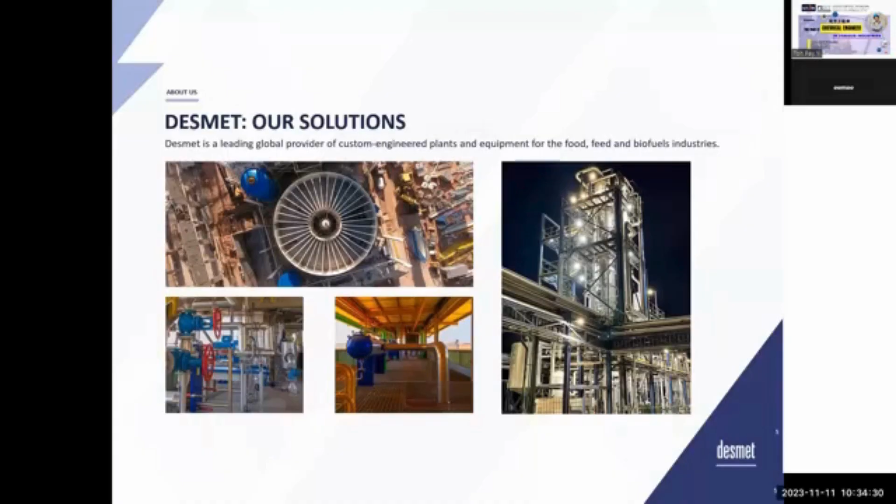So what you see here is some of our products. We are actually a technology provider, so our market is not limited to food, but also including animal feed and the biofuel industry.

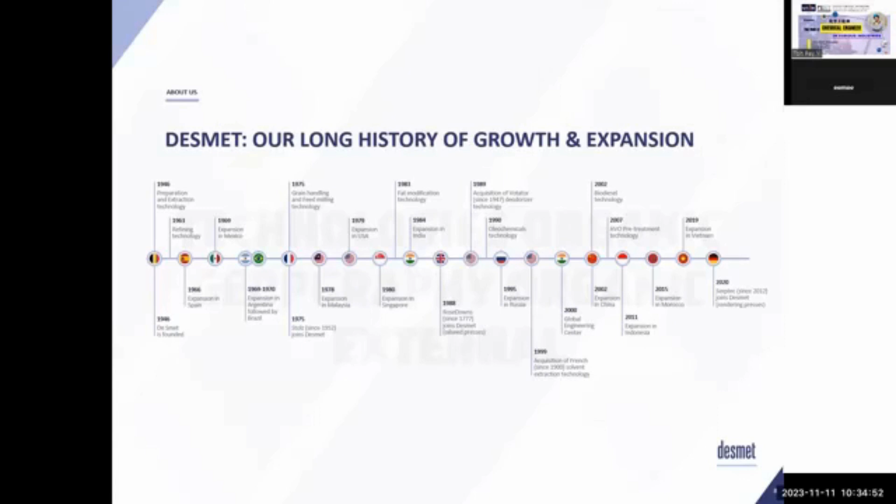Okay, so some key figures about our company. This company was actually founded back in 1946 in Belgium. Our principle that differentiates us is we always emphasize reliability, accessibility, sustainability, innovation, and being value-minded. When we mention accessibility, it's because we have a presence in more than 50 places around the world.

Okay, so this offers a complete technology offering from oil seed up to the product. From oil seed to the oil seed mill, then from there onwards we have the oil processing line, the biofuel, and also the oleochemicals.

Let's look at the production of vegetable oil worldwide. So from what you can see here, palm oil actually has the highest volume of production, with more than about 40% of total production over the years.

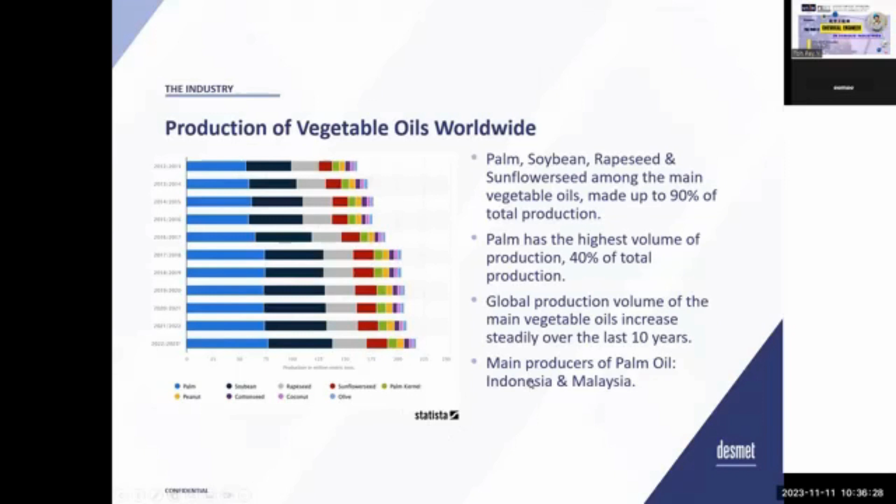So we can see that palm oil is steadily increasing over the last 10 years, and probably all of us are aware that the main producers of palm oil are actually Indonesia and Malaysia. That is about the production.

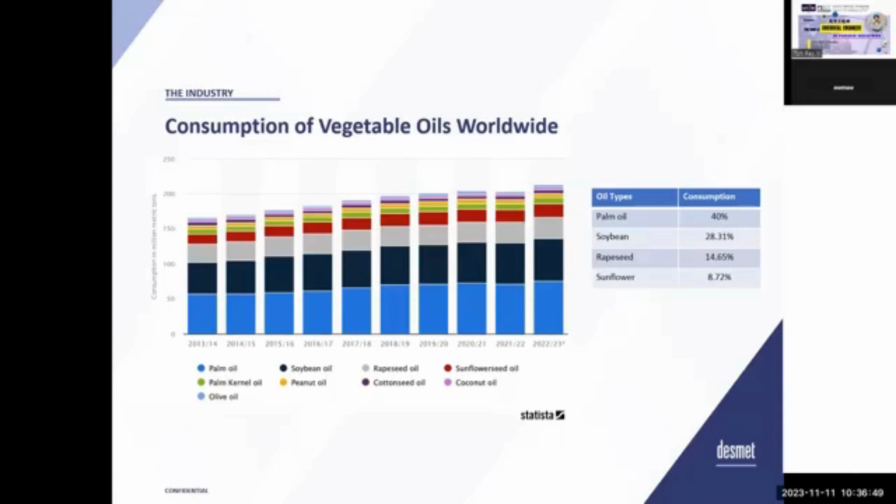So how about the consumption of vegetable oil worldwide? Again, palm oil is actually the major oil that is being consumed worldwide. So by far, palm oil is actually the most efficient crop.

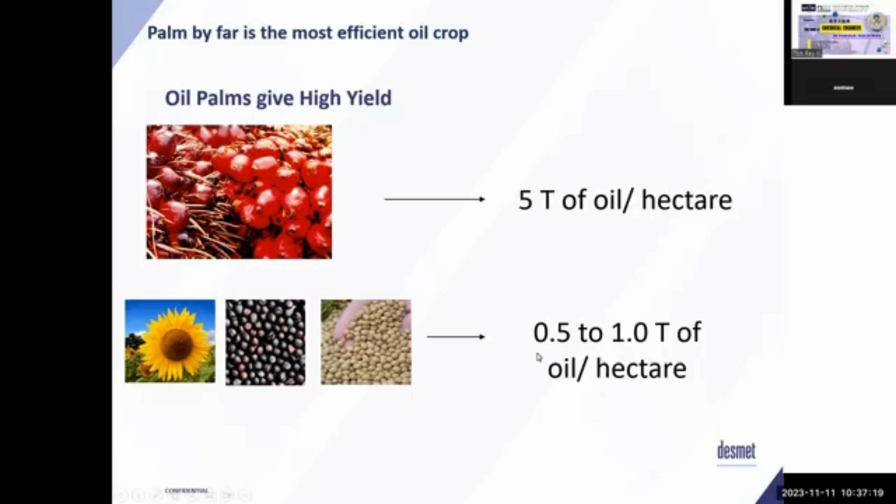Palm oil will be able to give a high yield, say 5 tons of oil per hectare of land, compared to other edible oils like sunflower oil, soybean oil, and canola oil that only produce 0.5 to 1 ton of oil per hectare of land used.

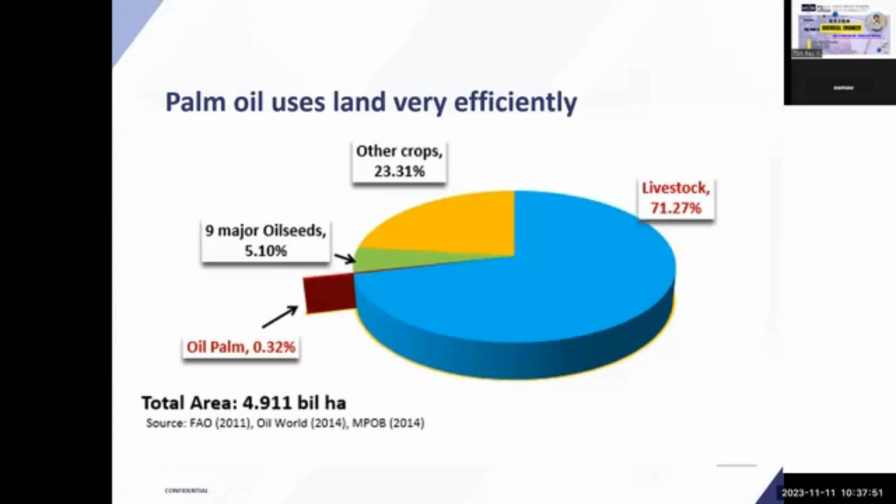So despite being the highest oil in terms of volume produced yearly, palm oil is actually using the land very efficiently. When we look at the total area required for oil palm plantation, it's actually 0.32% compared to others. Oil palm trees grow in the equator region.

Let's take a quick glance at palm oil in Malaysia at a glance. We are the second largest producer after Indonesia. We account for 10% of world oil and fat production. 5.8 million hectares of land are used for oil palm plantation, and this industry directly employs 600,000 people.

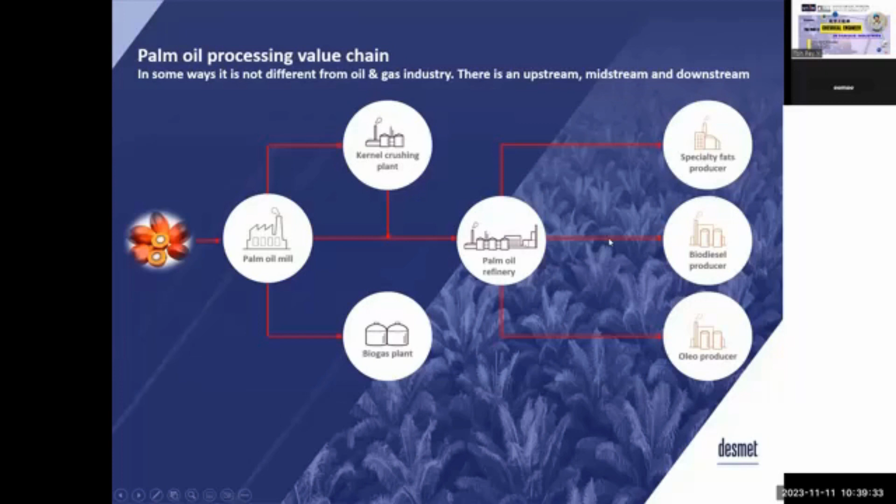So yeah, let's go back to our core, from palm oil processing. How do we get from the fruits to the oil, to the product, the refined oil? Palm oil processing value chain in some way is actually similar to the oil and gas industry, with upstream, midstream, and downstream. So the starting point of the journey definitely starts from the oil palm plantation itself.

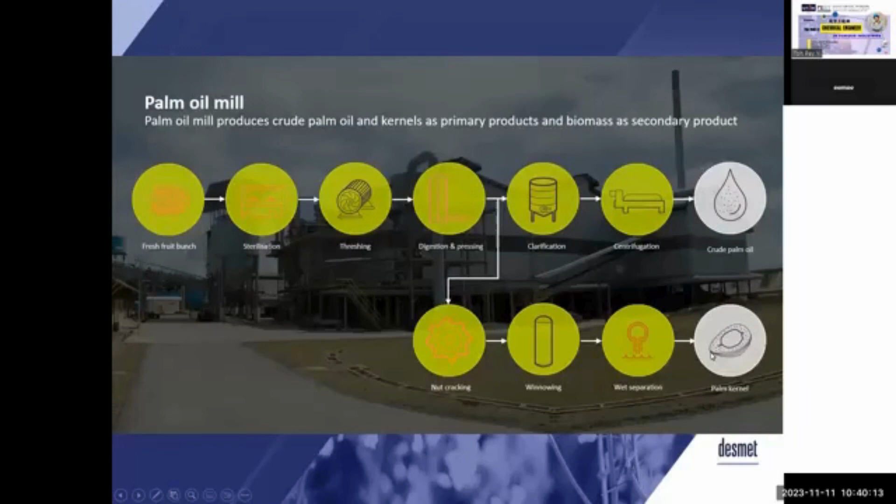The fruit bunch, where we take the fruits, will first go through the palm oil mill to produce crude palm oil and also palm kernels as primary products, and biomass as a secondary product. These are the key processes in the palm oil mill. Today our focus will be on the palm oil side.

This crude palm oil will go through the palm oil refinery and also the fractionation plant to produce the refined oil. There are several steps of processes that it will go through.

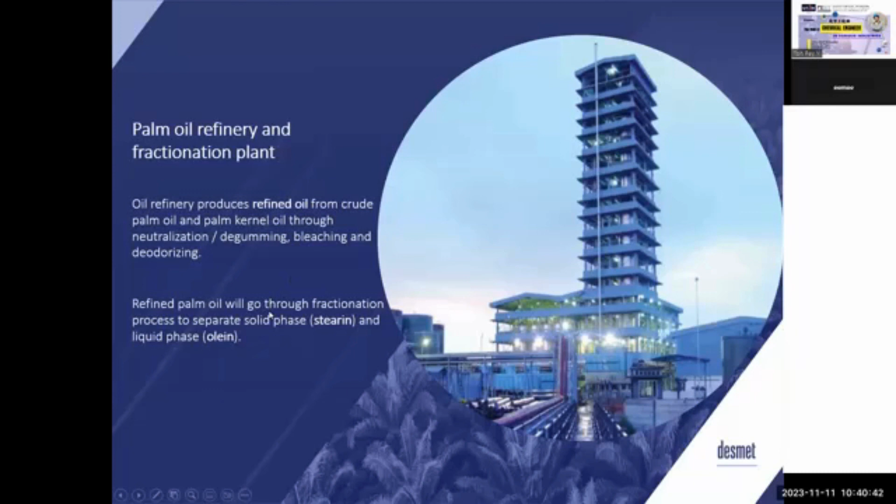The refined palm oil will go through the fractionation process to separate out the solid fraction, which is the stearin, and the liquid fraction, the olein. Olein is actually what you get in the market, whatever you're buying for cooking and things like that.

Why do we need to do this fractionation? At room temperature, if we do not go through this fractionation step, the solid fraction of the oil will actually cause the palm oil itself to solidify at room temperature.

The next one is on the oleochemical plants. Oleochemical plants, I would say, are equivalent to the petrochemical plants in oil and gas, but this is a palm-based oleochemical plant that produces fatty acid, fatty alcohol, fatty amines, and methyl ester using palm oil as a feedstock.

All these are actually intermediate ingredients used for cosmetics, personal care, including skincare, hair care, and oral care. If you look at the ingredients listed on the bottle behind your shampoo and things like that, you will notice something with palm-based material there.

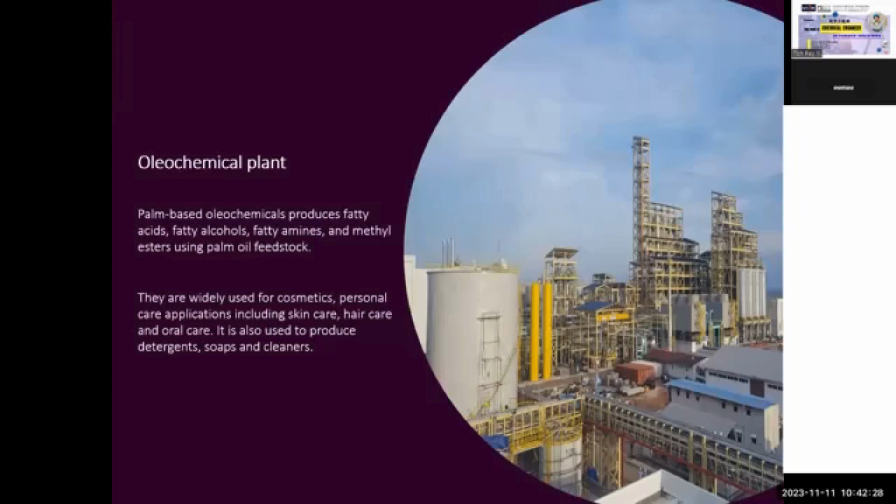Our role as chemical engineers is to improve the quality of life. We do this by getting ideas and knowledge from people together in biology, chemistry, maths, and physics, and putting it together as chemical engineering science.

We collaborate and exchange ideas in R&D. When you are properly trained and educated, we can make the process more sustainable and safer. So in the palm oil processing industry, we can apply our technical knowledge in practice.

For example, in process technology, you can apply the knowledge you have learned about distillation, crystallization, filtration, and separation. Mathematical modeling can be used to develop and understand catalyzed reactions, spray crystallization, safety and loss prevention, and things like that, as you can see from the slide.

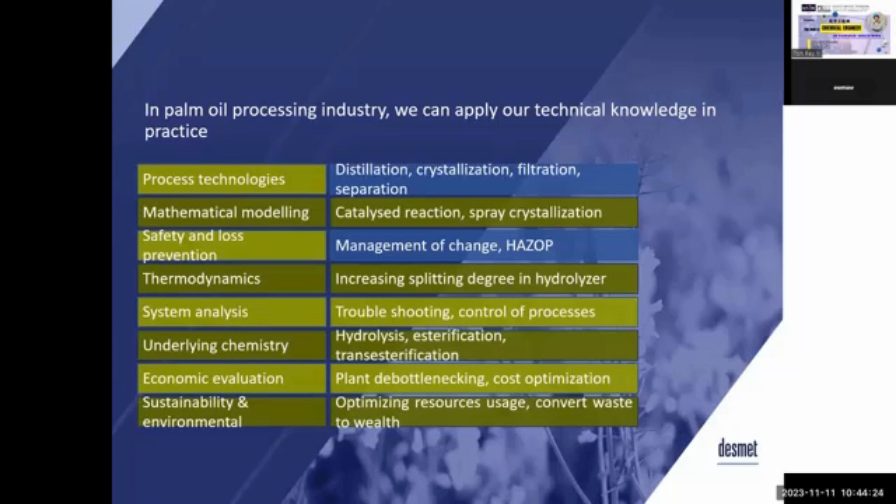In the chemical processing, palm oil processing industry, the areas where you can find chemical engineers, like the ones mentioned just now, are not limited. We have various fields that involve chemical engineers. Chemical engineers are, I would say, one of the most versatile engineering fields.

Once we have this chemical engineering background, we are very adaptable to take up any role in the industry. So, not limited to, you can find chemical engineers in process plant operation, design of process plant and equipment, legislation, regulation, development of products and services, project management, administration, R&D, sustainability and environmental, technology, economics, evaluation, quality assurance, teaching, managing and training, E&I, instrumentation and control, etc.

One of my roles in this map is actually from concept to real plants. From concept, where we start with a process flow diagram, to presenting it to the end user, to the processor, to discuss the concept of the process flow.

From there onwards, we will develop the PFD into a P&ID. And from there, of course, there will be several steps in between, and detail engineering and all that will come into place, and we will turn it into what do you call that.

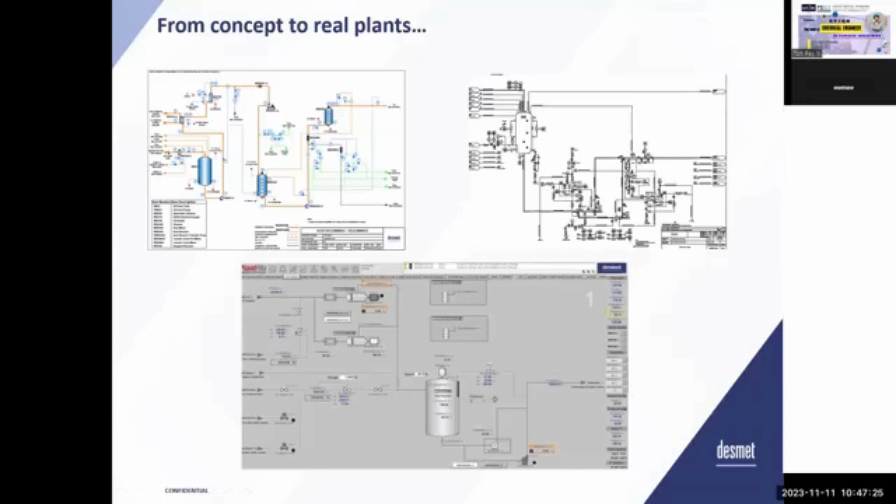The next step is to develop into the details, where all the instruments will plug in to ensure that the plant is designed not only to run efficiently, but also to take care of the process and safety aspects of the plant. So this is one of the vessels and the pumps.

So, challenges and opportunities in the palm oil industry. The increasing demand on oil, the demand and oil prices worldwide, puts pressure on the supply chain, especially in a developing country like us in Malaysia.

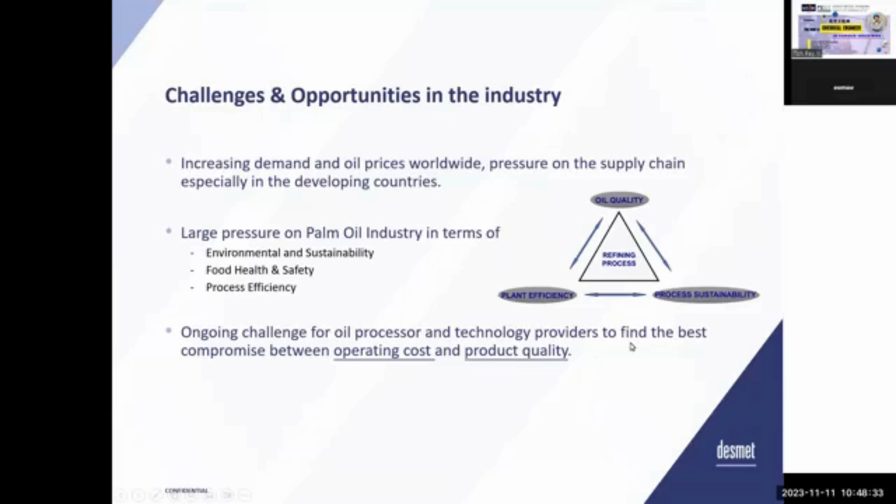The large pressure on the palm oil industry is in terms of environmental sustainability, food health and safety, and also process efficiency. So it's always an ongoing challenge for a processor and provider to find the best compromise between operating costs and product quality.

So what does the palm oil processing industry expect from chemical engineers nowadays? These are the four critical aspects: able to apply knowledge and understanding to practical situations, able to manage interpersonal relationships, demonstrate leadership, and exhibit communication skills. Commit to a high standard of professional and ethical conduct. Commit to continuing professional development related to professional knowledge and competence.

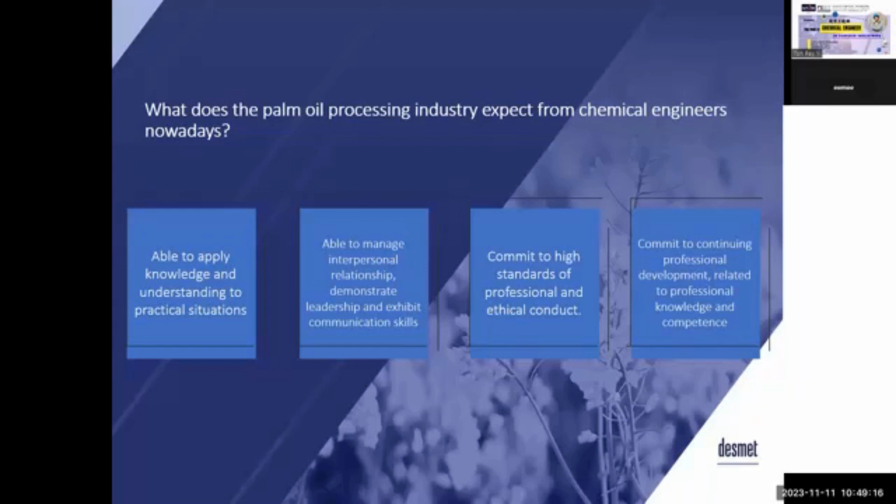That's all from me. Thank you.

Thank you, Ms. Law, for your sharing. Your sharing is very insightful, and we found that your job scope is a bit different from the chemical engineer just now, Mr. Wan. Your job scope, it seems, is based on the project you receive—you need to design it, come up with all the drawings, go through the simulation in the computer, and then continue the process to construct the factory. Is that your job scope?

Yeah, correct. For me, my job scope, we do not work on the operation side, but more on the design—engineering the design of the process plant, the technology to suit whatever the end user requires for the production of a certain product. Eventually, we will travel to the site to commission the plant, to demonstrate to them how to run the plant, and hand it over for the operation team to continue the operation.

Wow, sounds interesting. So you are not the one to work inside to operate the plant, but the one to design the plant. So now we design and train them.

Actually, I have a question for you. Given your high level of responsibility as an engineer to design, construct, and even operate the new plant, can you share how you ensure that the project you design and complete is safe enough? Of course, in any industry, we abide by standards and codes.